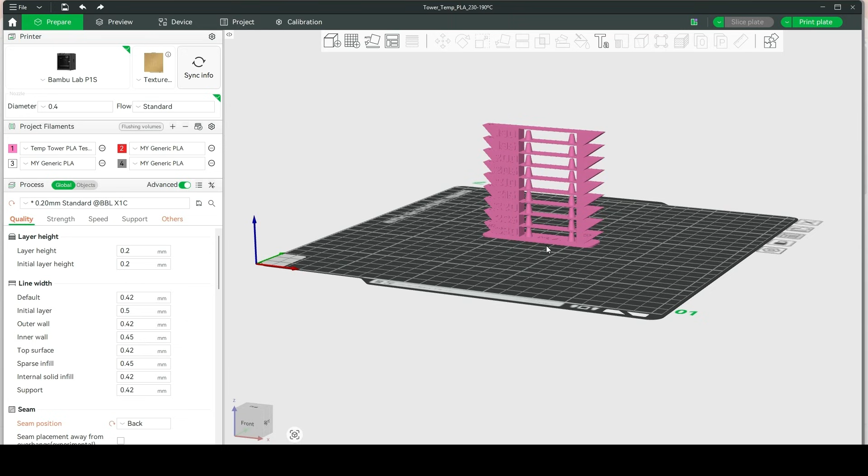In this video, we're going to be talking about setting up custom temperature towers. If you want to take your prints to the next level by dialing in your temperatures, you're in the right place. Let's jump right in.

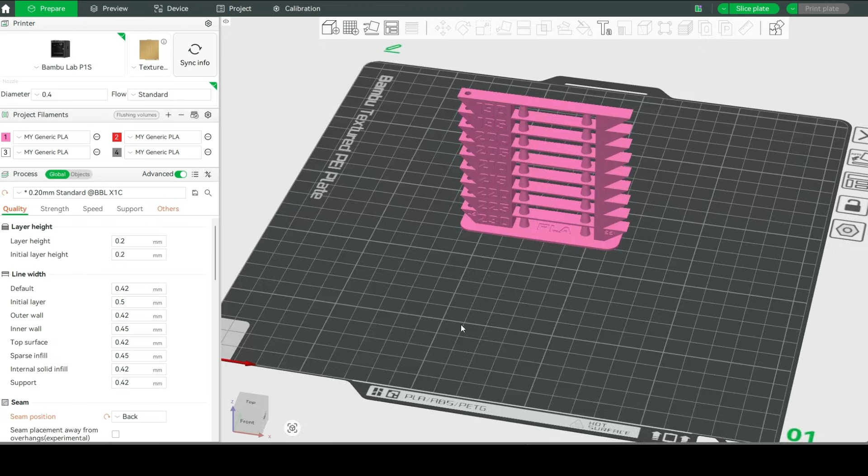Jumping right in. So we have our file loaded in. As you can see, it goes from 230 down to 190. It does not matter which temperature tower you go and find or download. When you import them, most of them will require you to add some custom G-code to make these temperature towers work correctly.

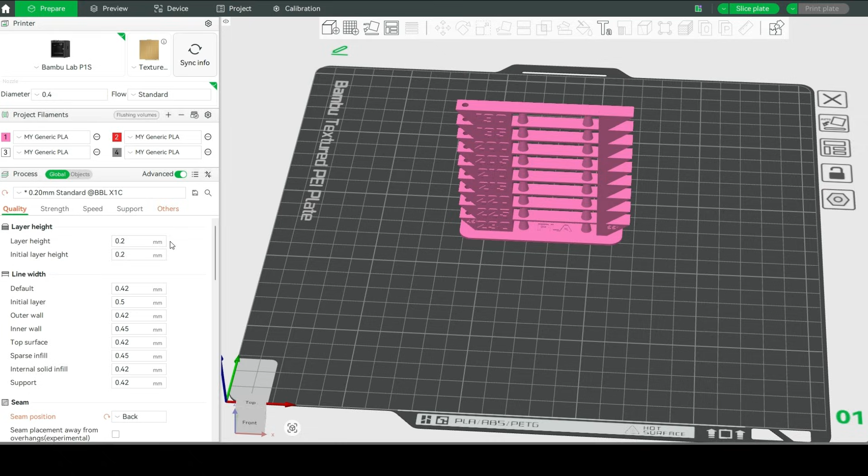So a couple settings I want to go over is I'm just using basic 0.2 millimeter standard. I push the seam to the back, and that's about the only changes I've made. The other thing I want to look at is in order for this temperature tower to work correctly, I need to have the starting temperature be 230.

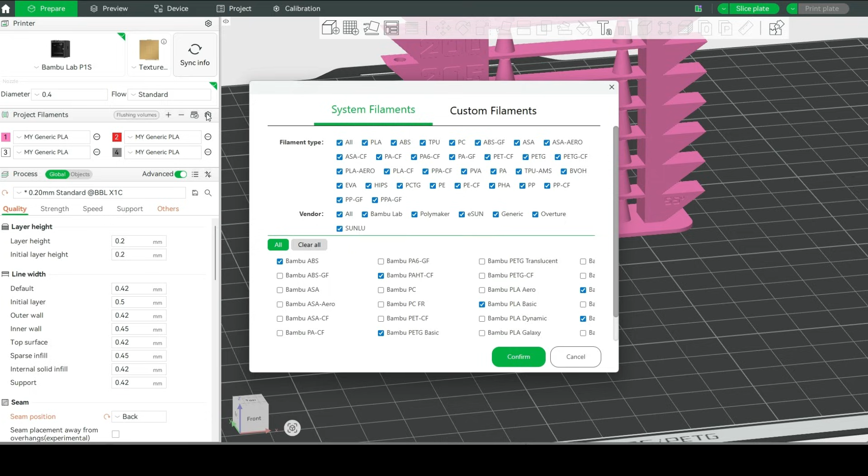And so what we're going to do is I need to create a custom profile for this filament. So I'm going to use this little gear icon we have here. And I'm going to come over to custom filaments, and we're going to create a new one. And so where it says select vendor, I'm not really worried about the vendor. I'm just going to select, I can't find the vendor I want.

And I'm going to add this in and just call this Temp Tower PLA test. And under type, I'm going to come down and choose PLA. And here I will just type in basic. Now I am going to build this off of a current filament.

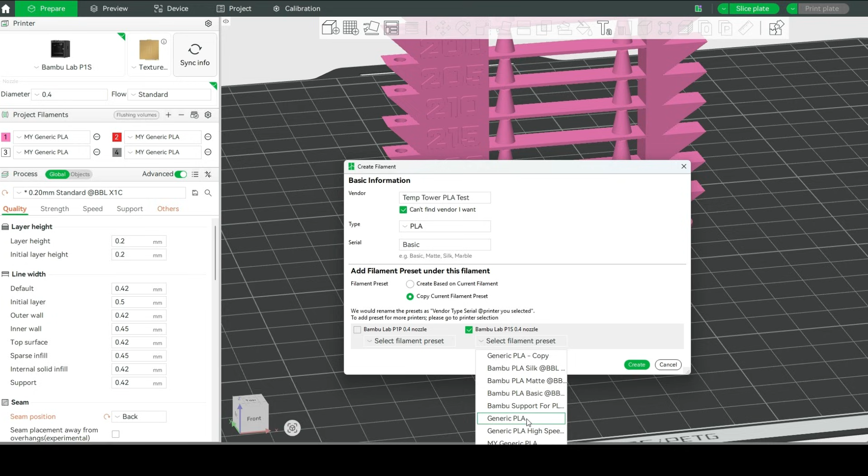So we're going to select the nozzle that I've got here on my P1S. And I'm going to come down here and just grab a generic PLA. And we will hit create. It'll come up and say your filament was created. So I can now go to the filament settings and edit what I need to.

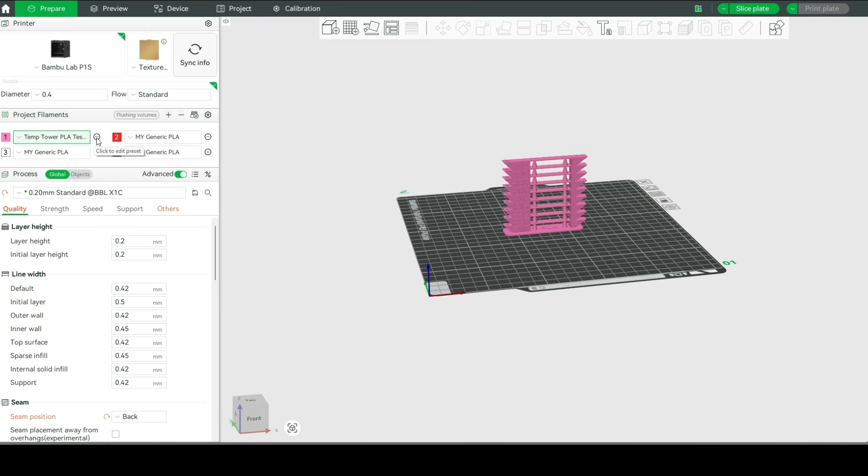I'm just going to go ahead and close out of this. Close out of this. And I should be able to select my filament now. And you'll see that it shows up right here under custom, temp tower, PLA test, basic. Now I want to go in and make some changes to this because again, I said my starting temperature needs to be that 230. So we're going to do a quick edit. Just click our three dots, edit, and scroll down.

You'll see, minimum 190, max 240. And the basic temperature it's going to start me at is 220. I'm going to push this to 230. Push every layer after the first layer to 230. And I'm going to hit save.

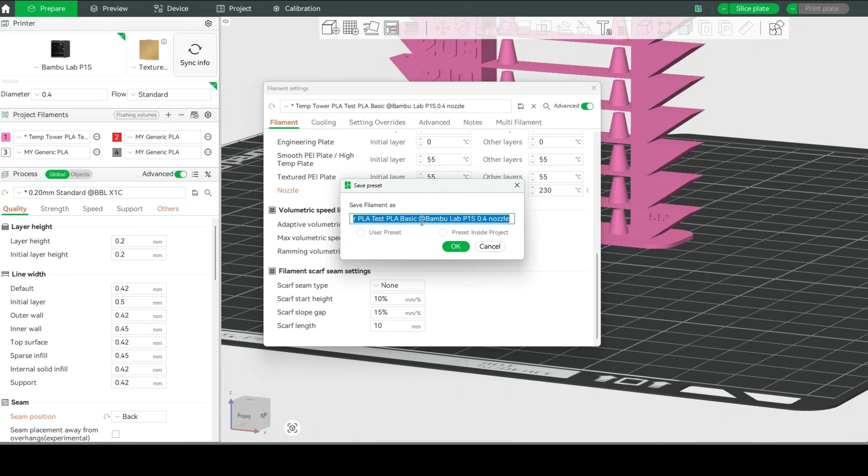And we're going to keep this here. Say OK. So now I've created my temp tower basic PLA test. And anytime I go to print a temp tower, this is the filament profile I'm going to choose for PLA.

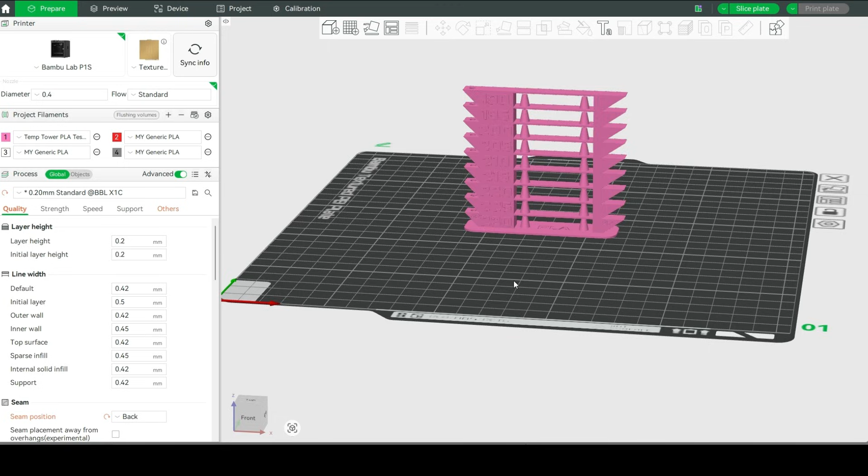All right, next step we need to do is we need to slice this plate. We don't need to change any settings. We can just hit slice. Now the slice is complete. I am set on line type, so I'm going to go and change this to temperature because that's what we care about. That's what we want to check.

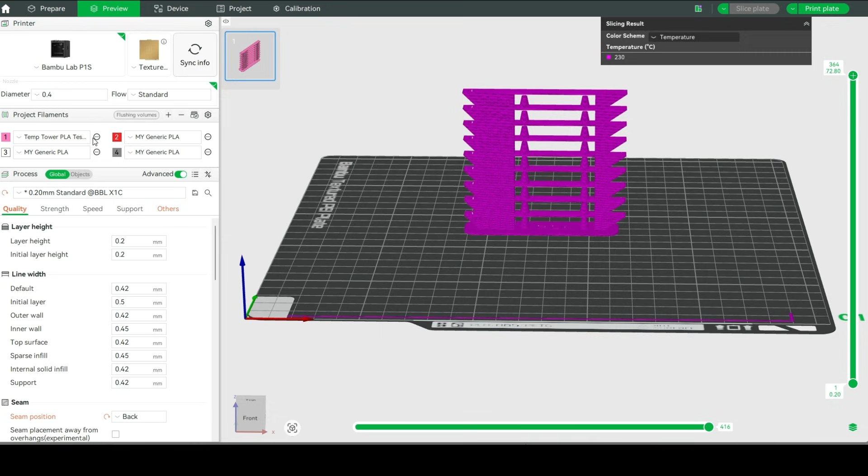And you'll notice everything is at 230. That is the temperature that we just went and set as the starting point. So what we can do now is we can use our layer bar over here and pull down to the exact point where we want to change the temperature. So we're going to zoom in pretty close, and I'm going to actually use my arrow down keys and get it exactly where I want it.

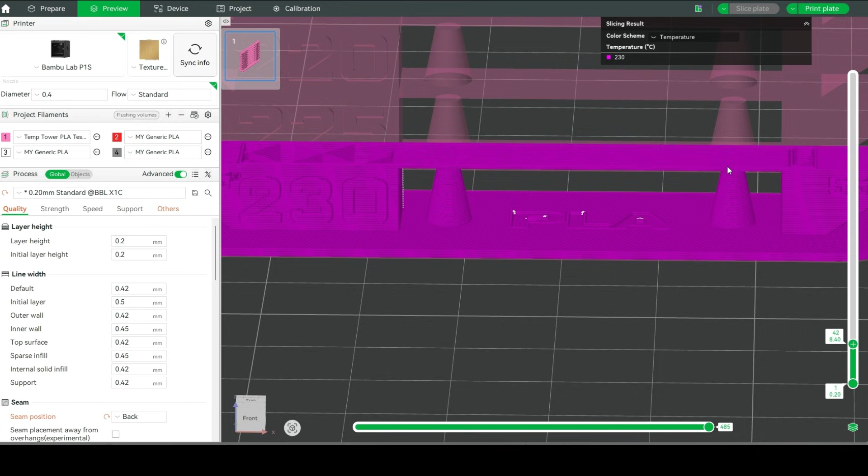So our first layer is going to be right here. And so I really want to look over here on these edges as I'm doing this and say, okay, where does that quit coming up? And so on the first time that stops, we're going to leave it there. So in this case, it's layer 43. I'm going to right click and add custom G-code.

So there's two schools of thought here. We can either add G-code M104 S and then the desired temperature, which is going to gradually drop the temperature from 230 to 225. The other school of thought is we could add custom G-code M109 S and then the temperature. So in this case, 225. And in this case, it's going to wait until the nozzle temperature drops from 230 to 225 before it starts printing again.

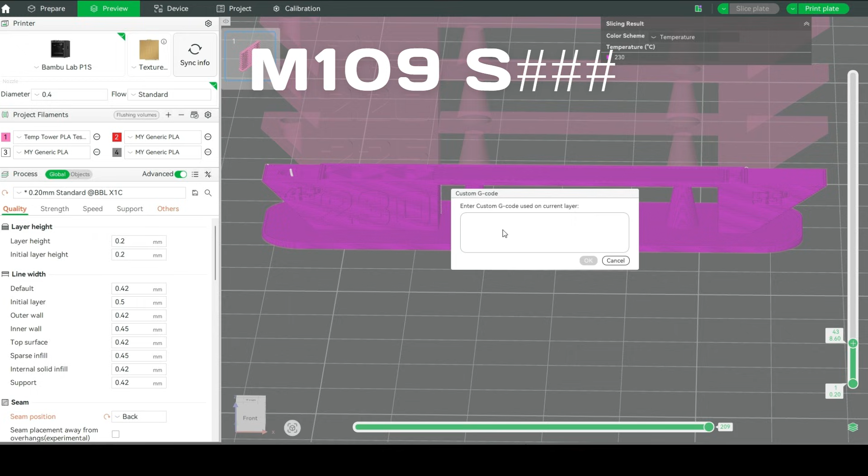So in this case, I want to only look at these increments of 5. I don't want any variations in the middle. So I am going to use the M109 S, and these pound signs I'm going to replace with the number that I'm going to. So in this case, 225. And we'll say okay. And I'm going to drag this up to the next layer.

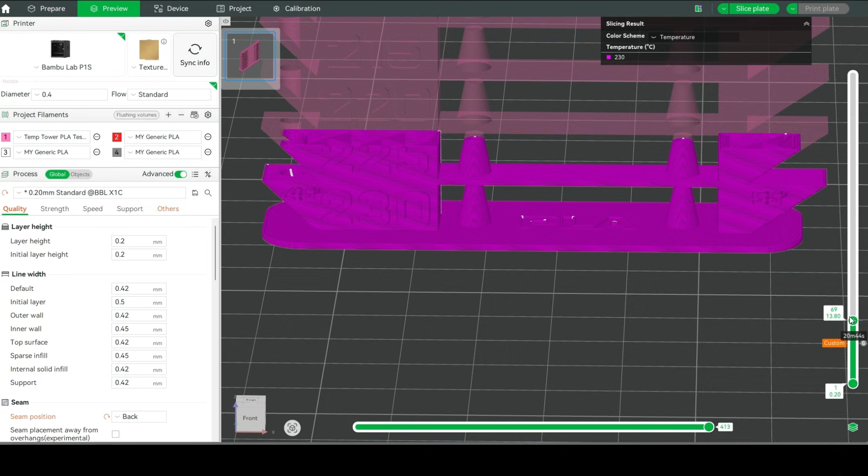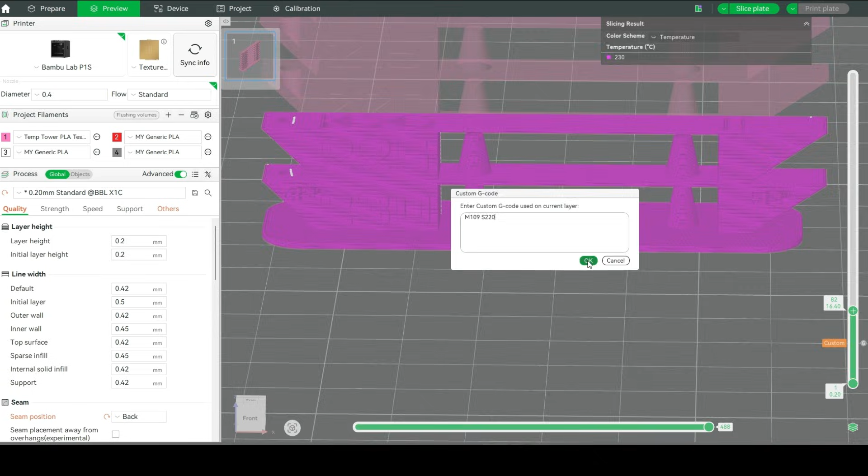And as I'm getting closer, again, use my arrow keys, figure out where that's at, and right click, add custom G-code. In this case, I copied it. So I'm going to paste this in, and we're going to say the next one is 220. And I'm going to do this until I get to the top of the tower. So stick with me. I'll go through and add these in, and then we'll reslice this plate.

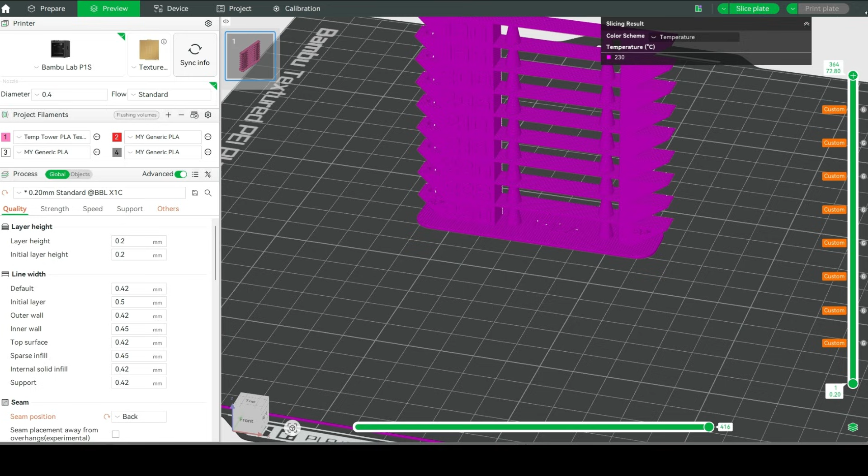All right, looks like we've got this done. So I'm going to go ahead and slice this plate. I have 1, 2, 3, 4, 5, 6, 7, 8 different changes. So we should be good in going from 230 to 190. After slicing the plate, you'll notice that the temperatures do go from 230 to 225, 220, 215, 210, 205, 200, 195, and 190. So this did work.

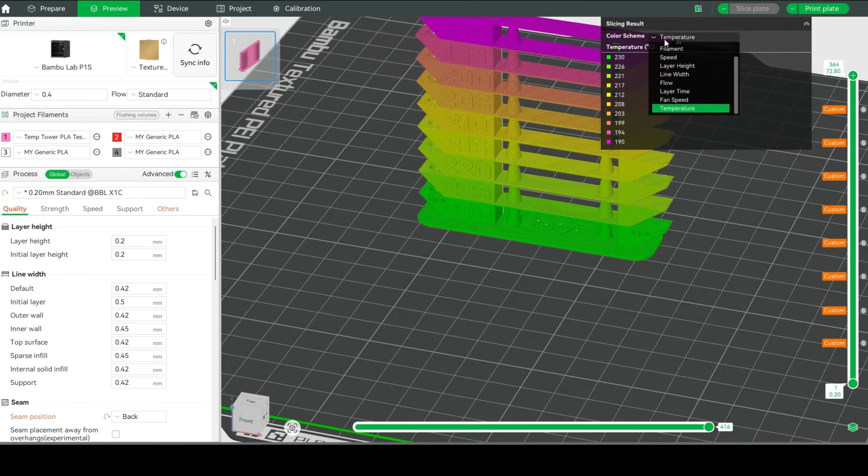This is how I want to test this file. So everything looks really good here. As you can see by just coming to your basic line type or your summary, it's going to take me an hour and 12 minutes for this to print. So we're going to go ahead and actually send this over and see how this turns out. I'll share the results with you here in just a second.

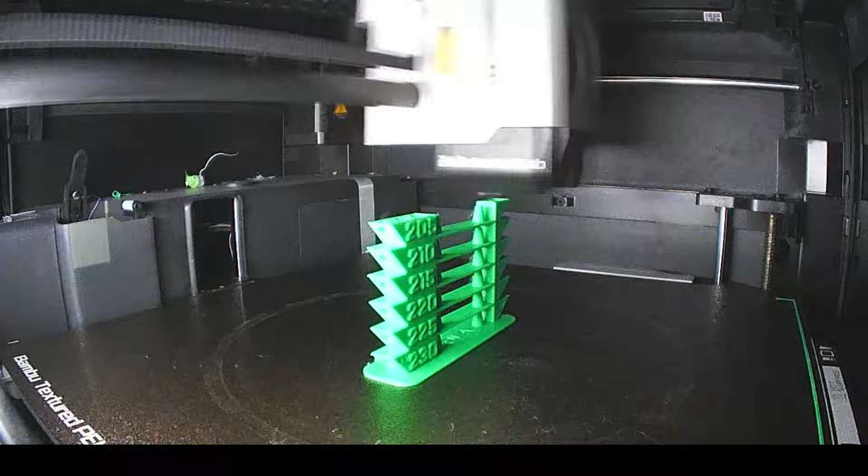This pretty much confirms what I thought about this filament, in the fact that it's very temperature stable. There are some of these that look a little better than others. I'm actually going to flip it to the back. But as you can see, differences, very minimal. There's some stringing down on the bottom, and it looks like that stringing stops right about on this layer here.

So looks like about 200 is probably going to be the best here, just based on the stringing. Quality wise, every layer looks pretty good. Surfaces, even on the angles, those overhangs, they all look pretty good. But I think 200 might be the number. That's kind of where I'm looking at.